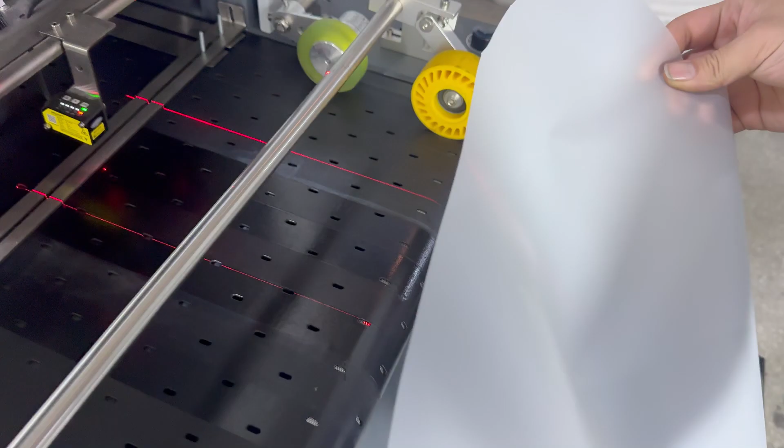Then we can start to do another check print. Before we do that, we need to find a full matte, half transparent material, like this kind of film, because the white ink cannot be seen when printing on white material. So before we print, we need to detect the media thickness. We put the media at the sensor position.

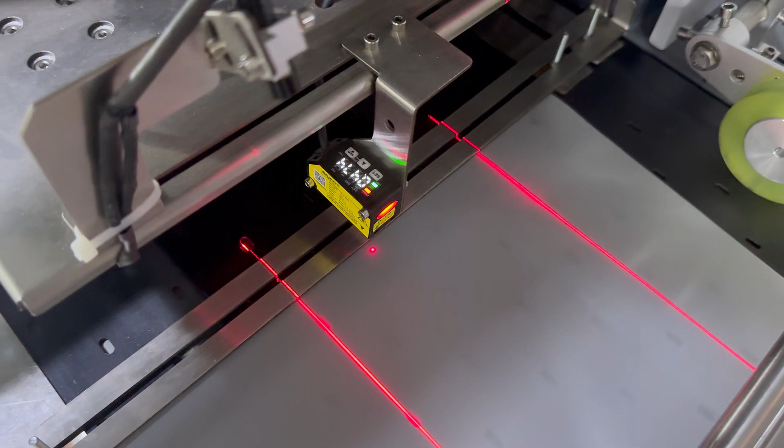Then we're moving up the carriage, and then we're moving down. When the red light is on, it means detection is finished. Then we need to close the vacuum. Close the vacuum, working. And we load the film from the front.

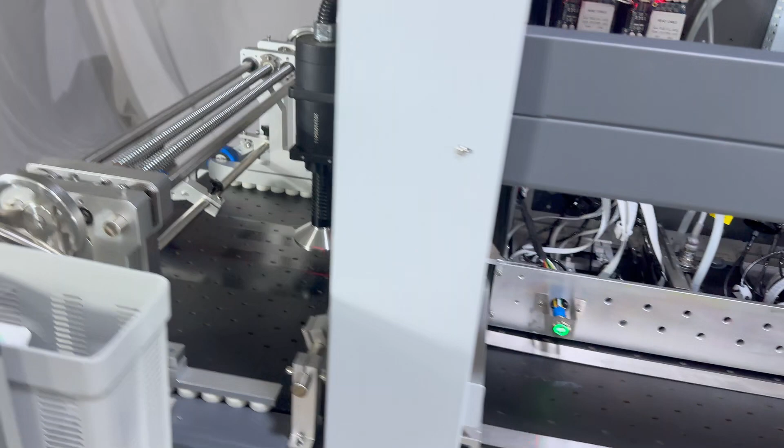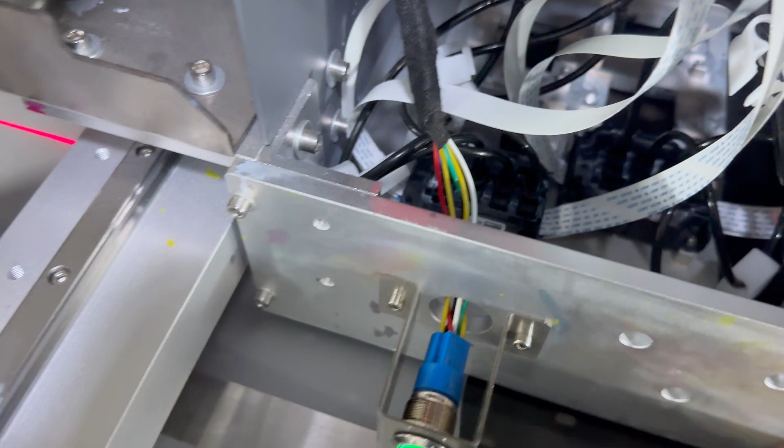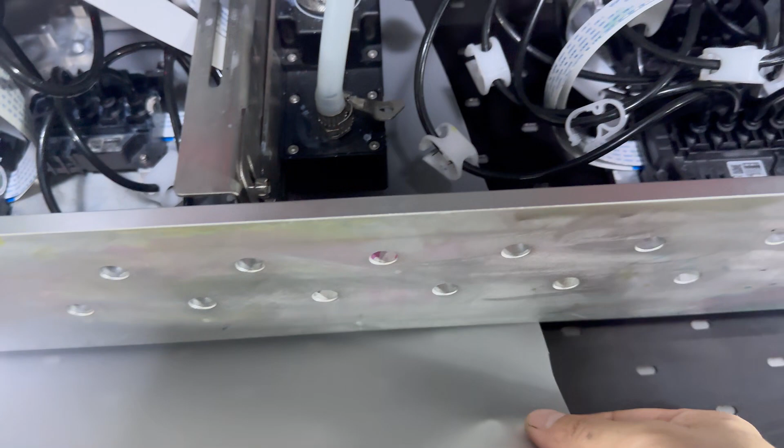Over the red color sensor to the printing head position. We can adjust, first move out this kind of pinch roller. Load the film to the bottom of the print head position.

Then we adjust the position of the pinch roller at the left and right side, at the lock. And also we adjust at the right side the pinch roller. We move it to pinch the media. Then we lock it.

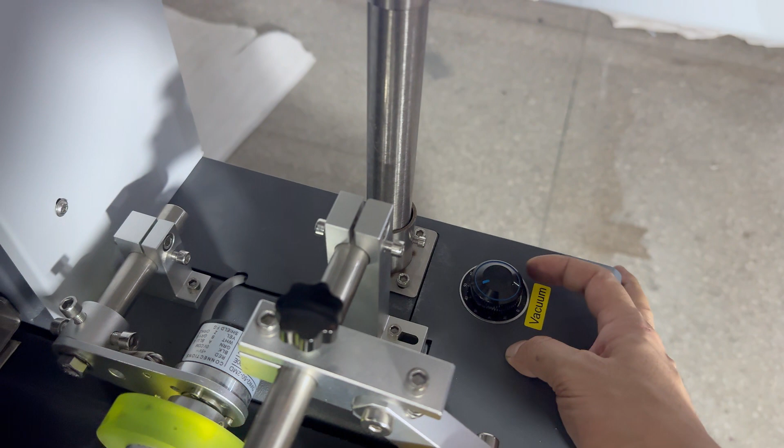And we also need to adjust the pinch roller strength from left to right side. Then we open the vacuum from the control panel and adjust the volume. This is maximal. If your media is bigger, then you only need to open it to 1/3 value.

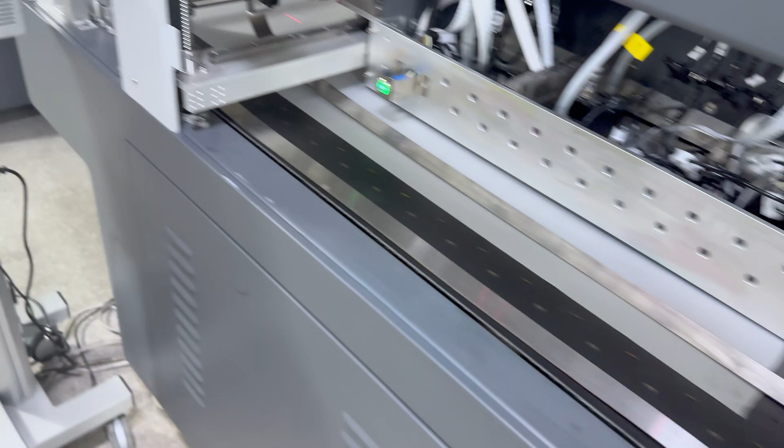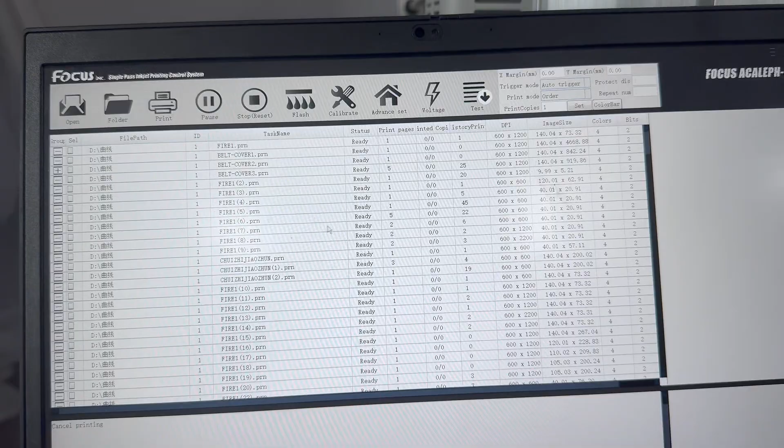Then we go to open the control software. We open the print engine, single pass. I choose the CFG file for the different print head model. Right now we have 8 heads, so we choose 8 heads. And here, then we can see the interface.

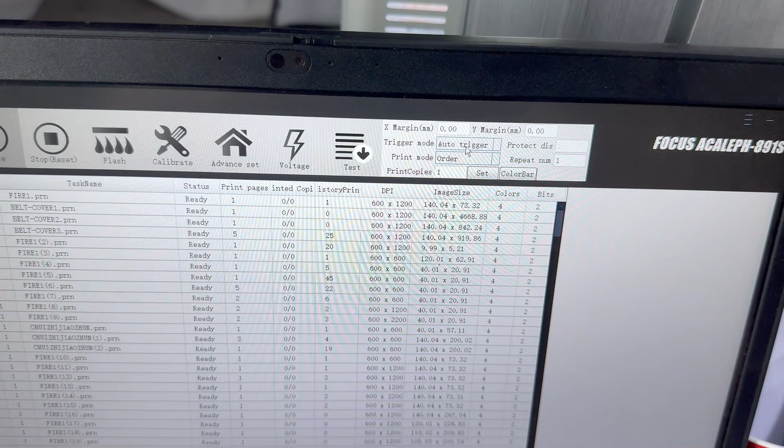First, we choose auto trigger here. If you are using DTF film, you choose auto trigger. If your media is in pieces, then we choose trigger sign. So we choose auto trigger.

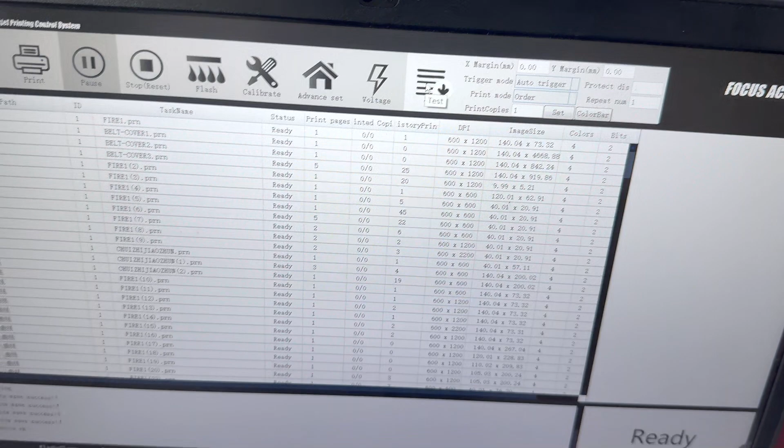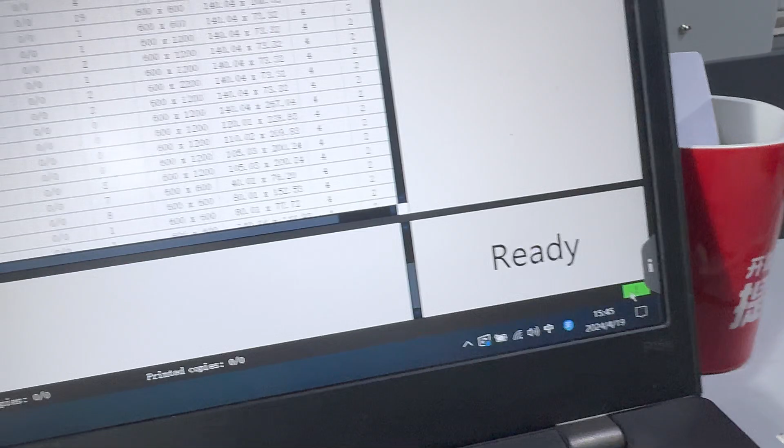Then we do a check. First, we check if it's still connected. Here, it's still connected, and all 4 control boards are powered on successfully. And here there's no error message. There's no error here. And then we go to voltage, and we check if all print heads' temperature is detected.

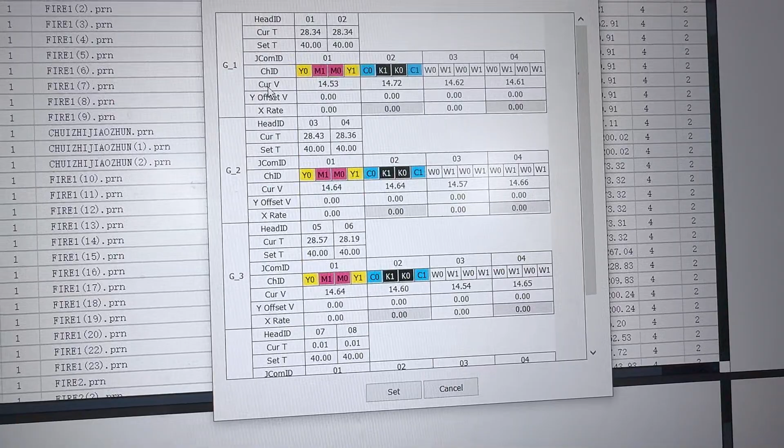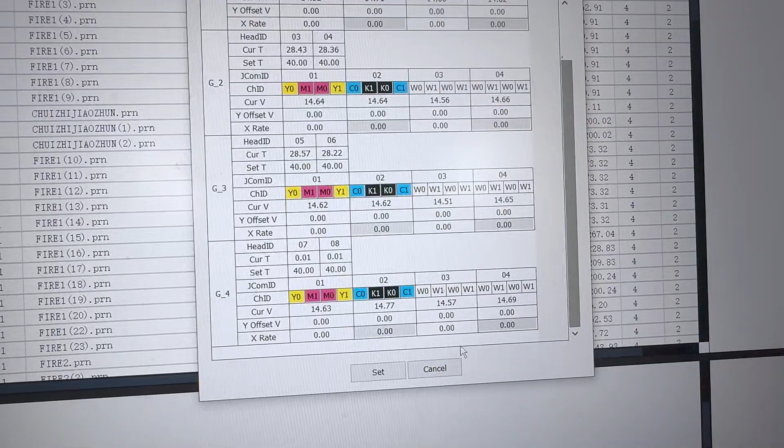Then we can start to do another check. We go to test. We choose load head status image. Then here we start to process.

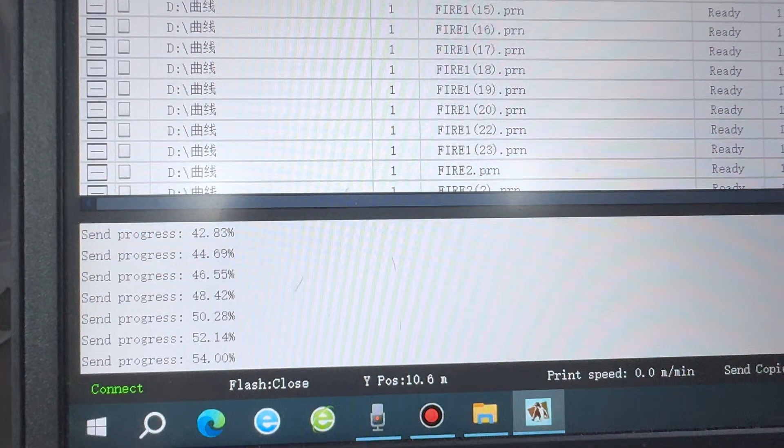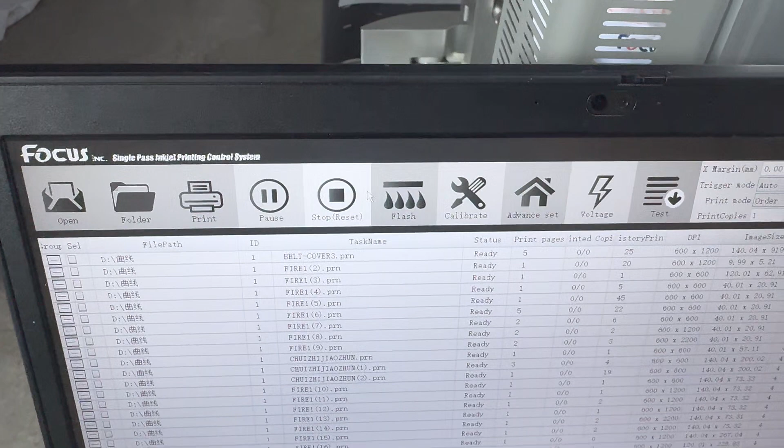Right now we must stop the belt motion. When it goes to 100%, now it shows 100%, and here the icon becomes gray. The print icon becomes gray. Here it shows print, then we can go to the belt control panel.

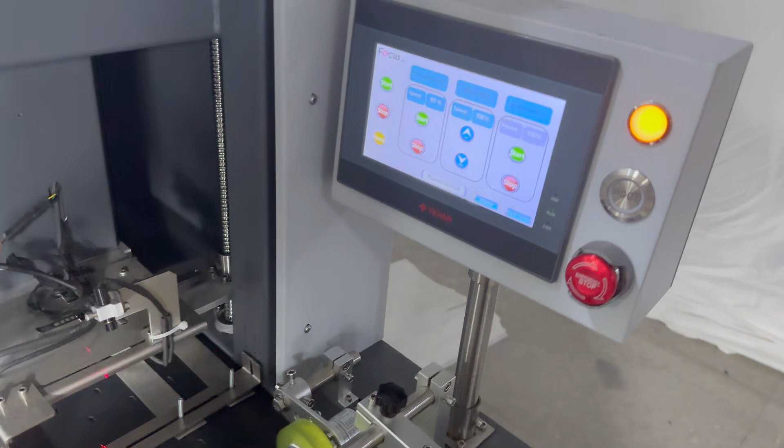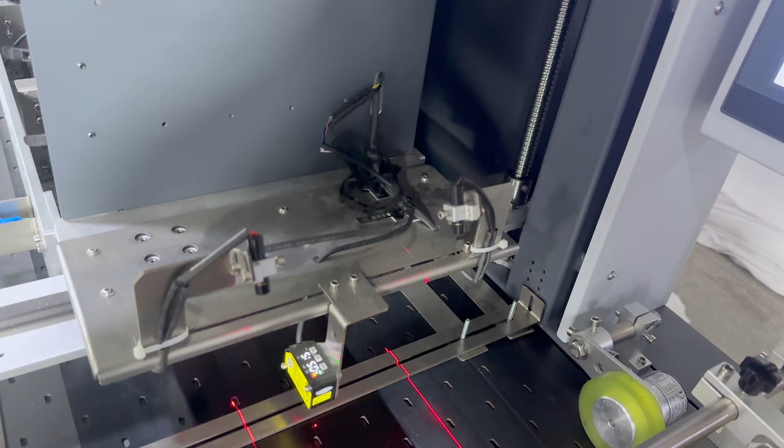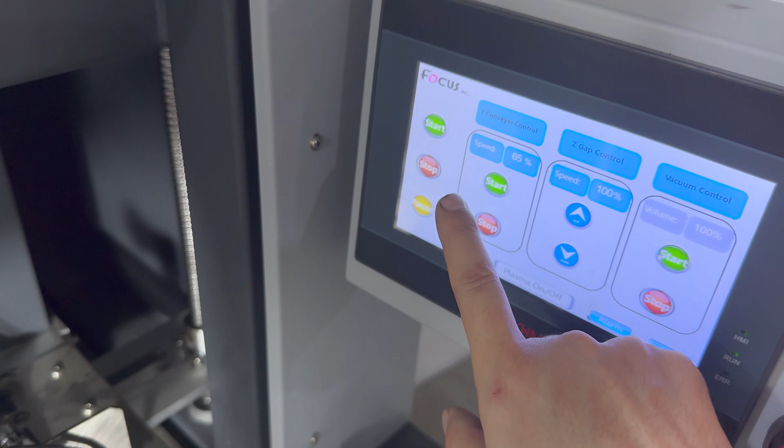And if your machine is the UV version, you need to power on the UV lamp and adjust the UV power strength. Then we go and click start. We set the speed to 65%, maximum is 100, but the speed is according to your printing head's printing resolution. Then we click start.

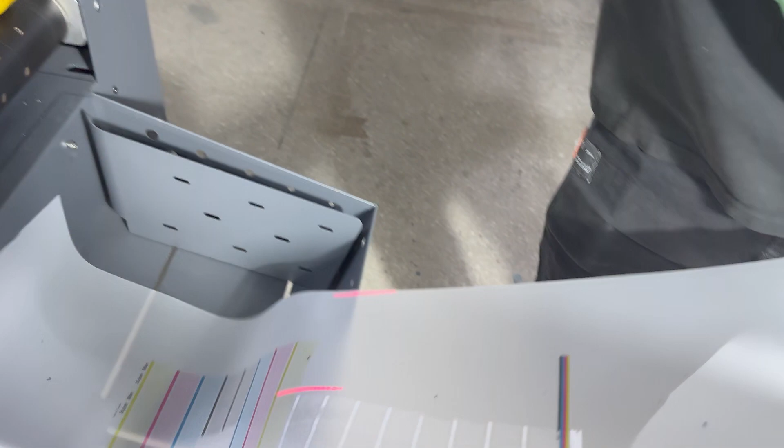Then the film starts printing. Then we can see the check print is finished. You can see the nozzle here. You can see the white ink still has bubbles.

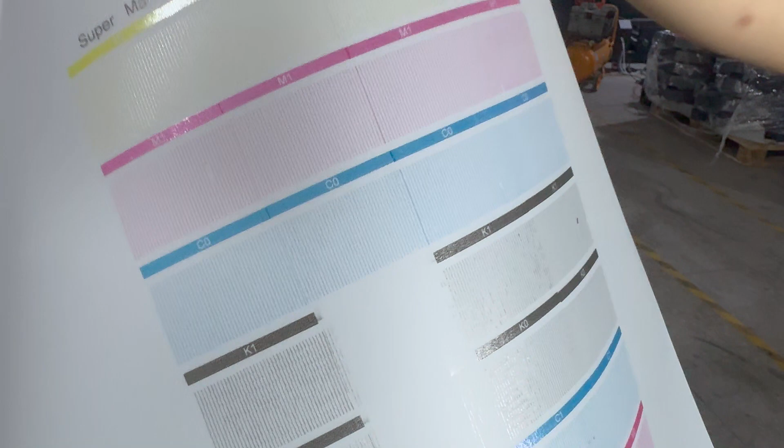The film goes through this way. So this is the first white ink, second white ink, and number 3, number 4 we did not put heads, so they're empty. For the color printing head, we can see number 1 white color printing head, number 1, number 2, number 3, number 4.

And for the color printing head, we can see the number 2 printing head's black channel is missing. So we need to double check. And also the white ink needs cleaning. It has bubbles or is clogged. So if it's the first time to load ink, we need to do some flushing.

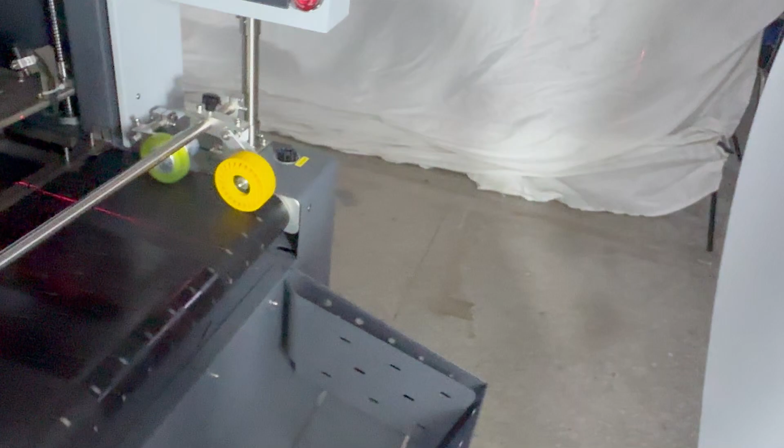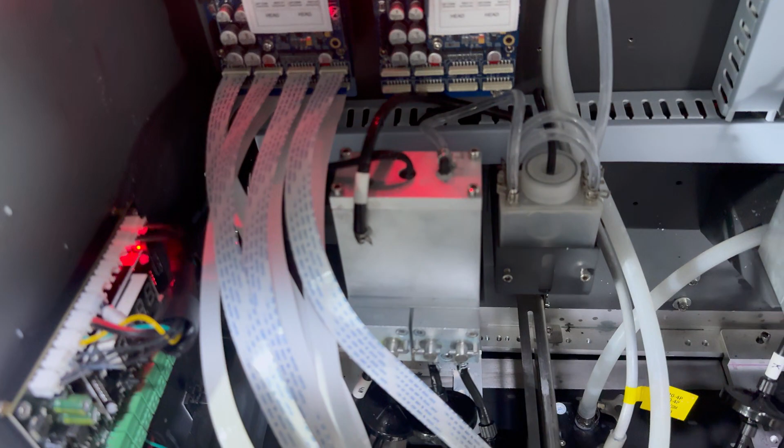Then we go to first stop the belt. And we go to the printing head position. We can see here we find some problem, so the missing channel has two possible solutions. First, maybe the printing head got clogged. Number 2, maybe the ink channel is not going through, it's closed. So we check the first printing head, the second printing head,

is closed or not. So we can see here the second printing head has the black channel issue. We can check and see this is a problem where the valve switch is closed, so we need to open it. You need to double check to be sure all the switches are open, and all the switches and the sub ink tank are open.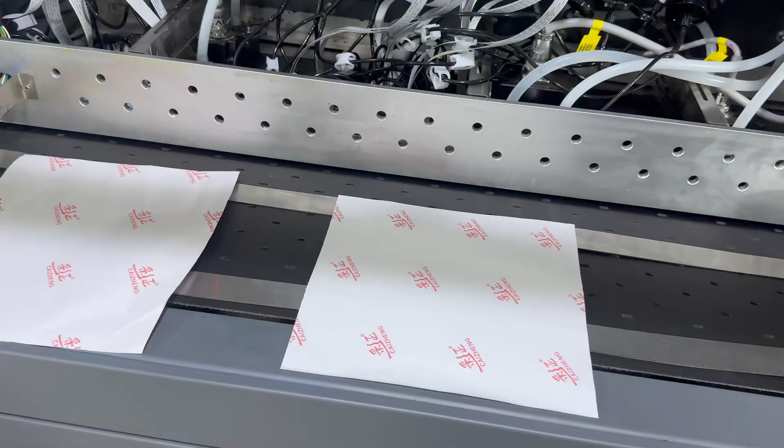And still we need to do a flush to flush the ink out a little bit. Then we check again. Then we start the flushing job using the control software to make the missing nozzle come out.

First, we go to the control panel to move up the carriage a little bit, not too much. Then we put the plastic paper at both printing head positions, white and color. The paper must cover all the print heads, otherwise the ink will flush onto the belt and make it dirty.

Then we go to the control software, go to advanced settings, and increase the flash frequency by 1 to 2 times. Then we click save, then we click flash.

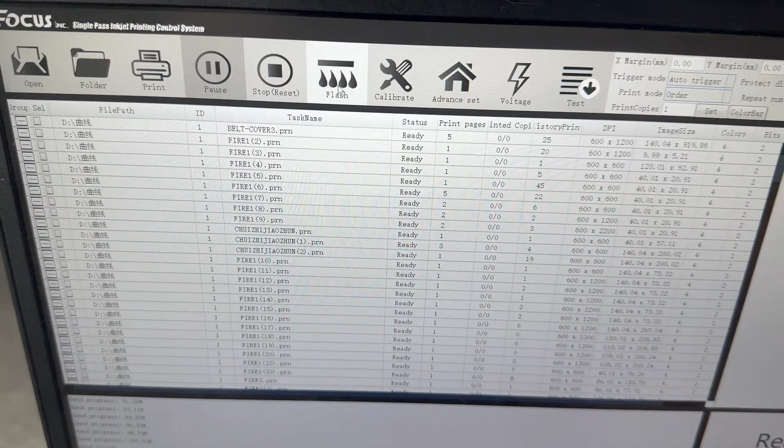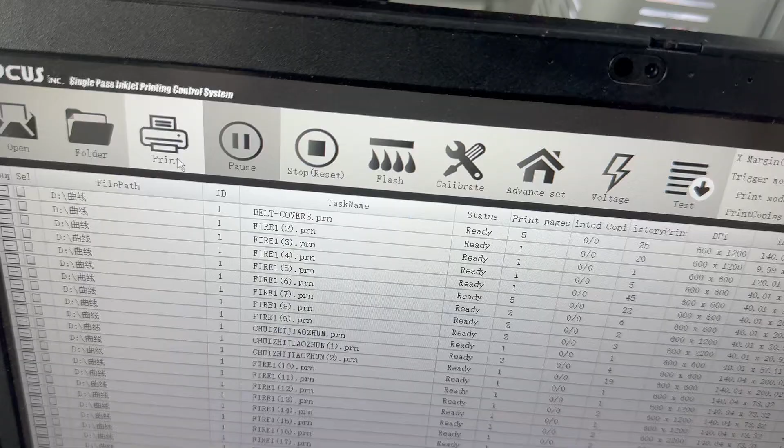Then the ink starts to flush out at the bottom onto the media. When the flash finishes, it will go back to the print interface. We flash again.

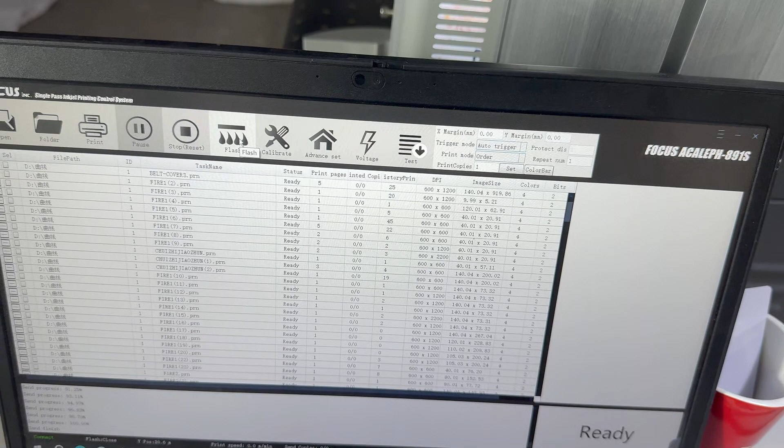Then we can check, we can move out the paper carefully. You can see the ink flush out, and also white ink. Because for white ink we only install 2 heads, the white ink still flushes out.

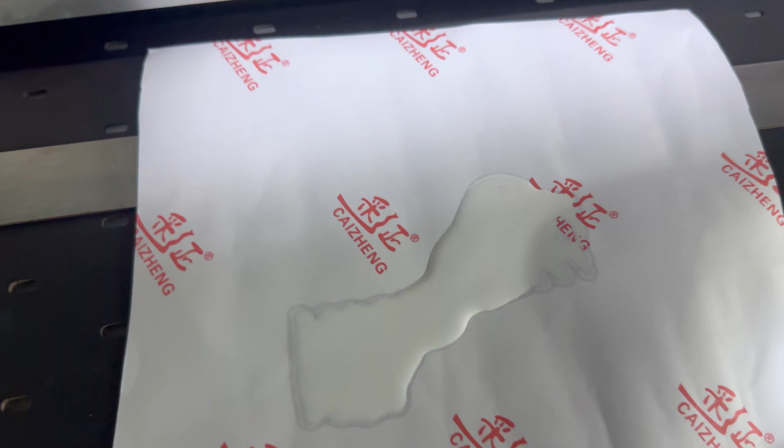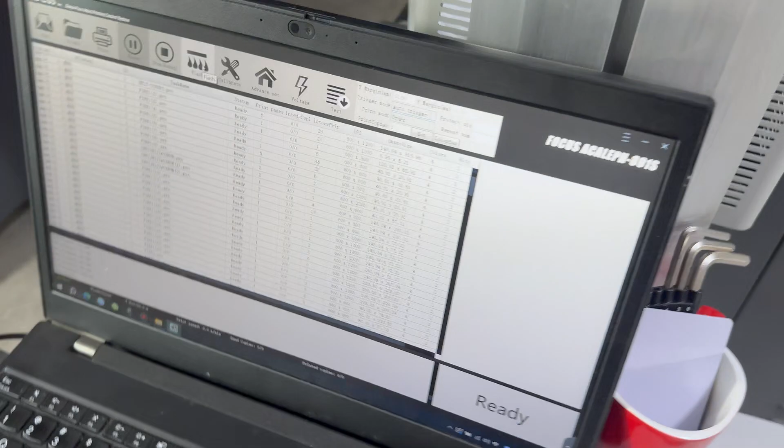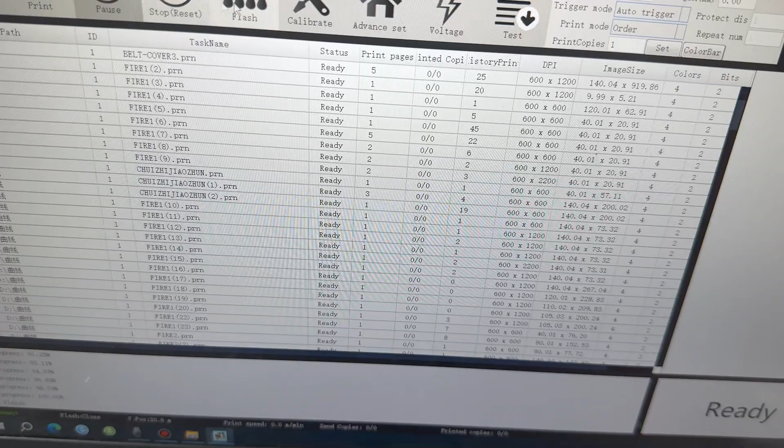And then we flash again to check. This is for checking, not for cleaning, to check if all the nozzles are flushing out.

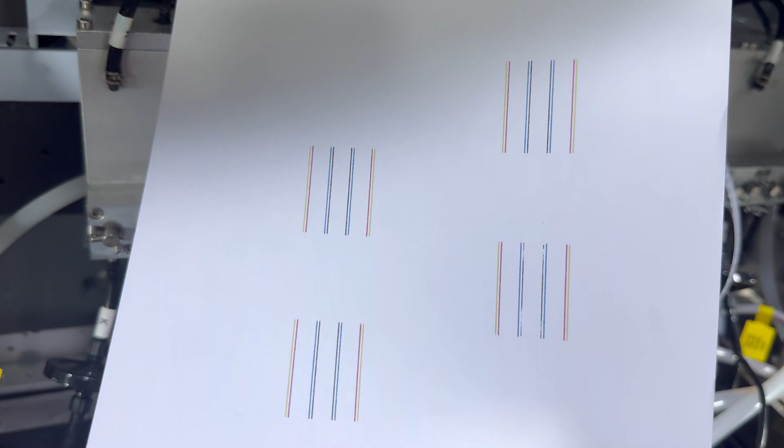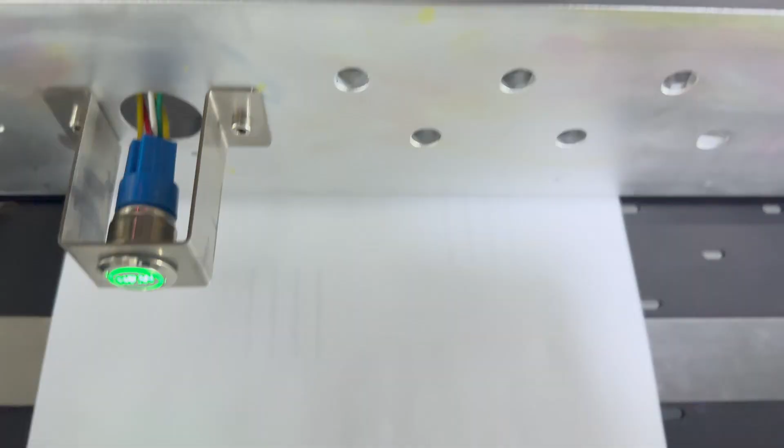After you finish, then we can see the black coming better than before, but still not enough. So this way we need to move up and clean by pressure. And with the wet ink, you can see it all coming out from both heads.

So this way we need to move up the carriage. Move up the carriage. Back, please. Touch screen.

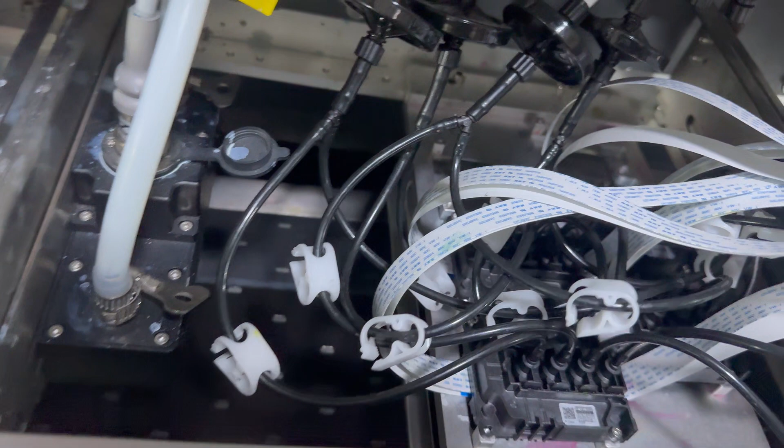So we just need to flush the black. We close the other colors. We close the first one, the black.

We keep it because it goes together. So we open the first one, close this one, and all the others are closed. Just flush the black.

So the other colors are closed. We just keep number 2, and number 1 and number 2 head black channel open. We need to flush one by one. So first we need to close number 1 head black, keep number 2 black open.

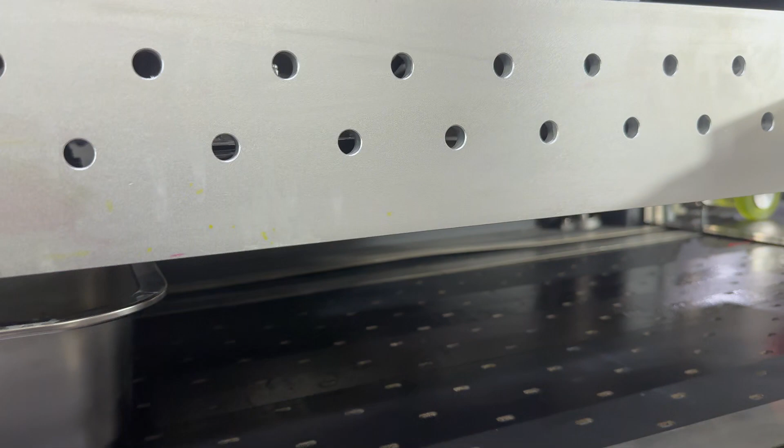And then we go push the positive pressure. You can see number 2 black is coming.

We clean for about 5 to 10 seconds, 5 to 10 times. And when we push down, we cannot keep it held all the time. We must push down for about 2 to 3 seconds, then release. 1, 2, stop, and 1, 2, stop, like this.

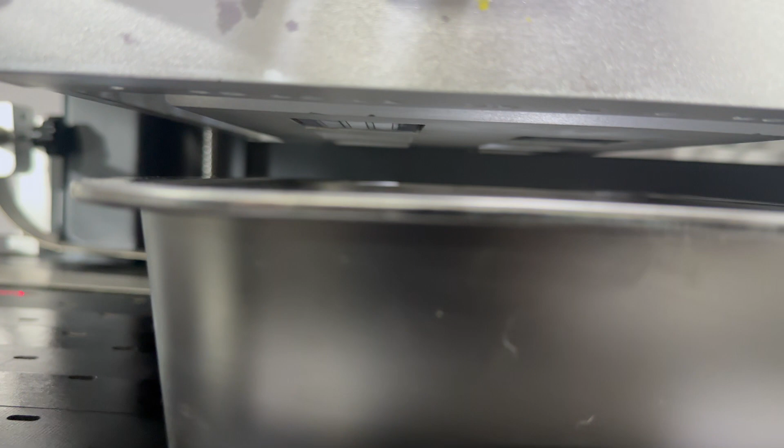And also we can see the black, and the white ink is also not good, so we need to flush the white ink a little bit.

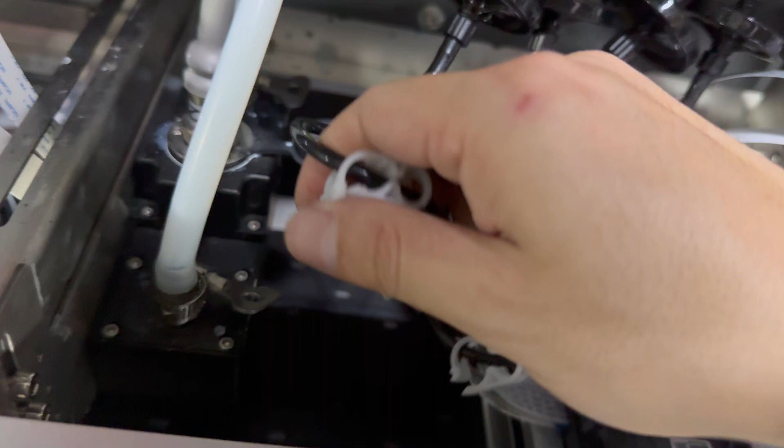After we flush, then we need to remember to open the valve for both ink tanks, the ink tubes. All must be open, not closed. And we flush again.

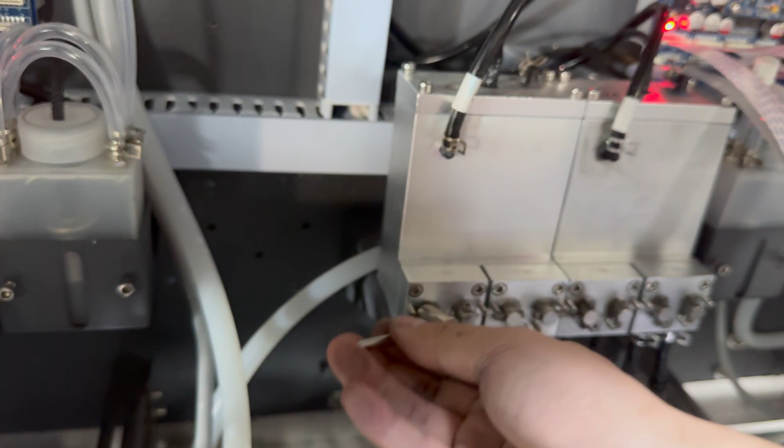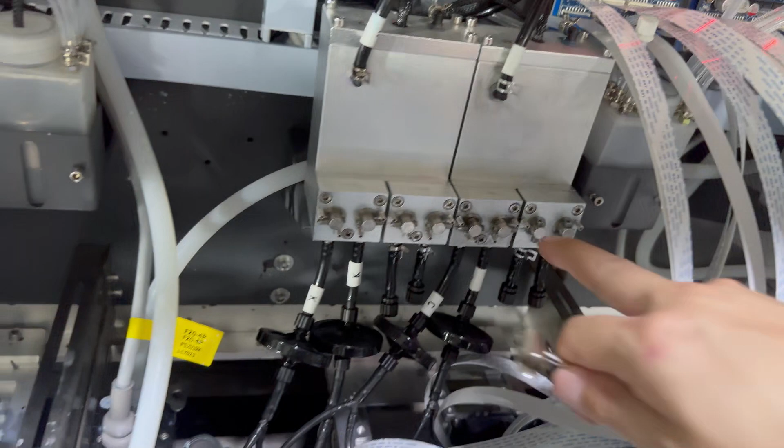After flushing, then we need to keep all open to work. Open all the valves, the switches. All are open for each color. All open, and also the white ink open.

Then we need to wipe out the waste ink at the head surface using the wiper tools.

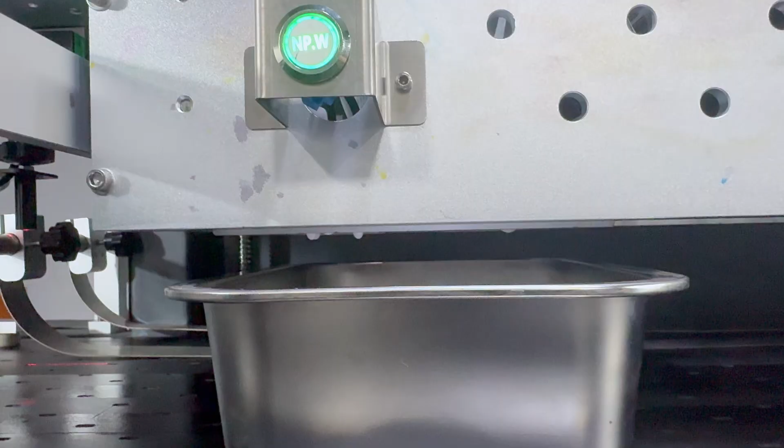And also wipe the white ink, both white ink heads.

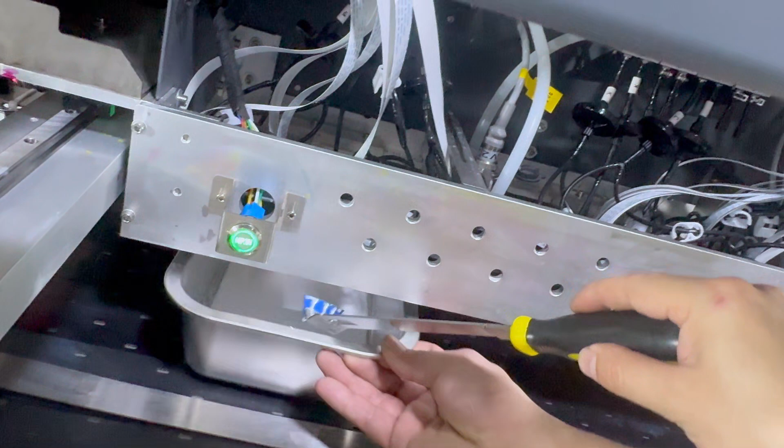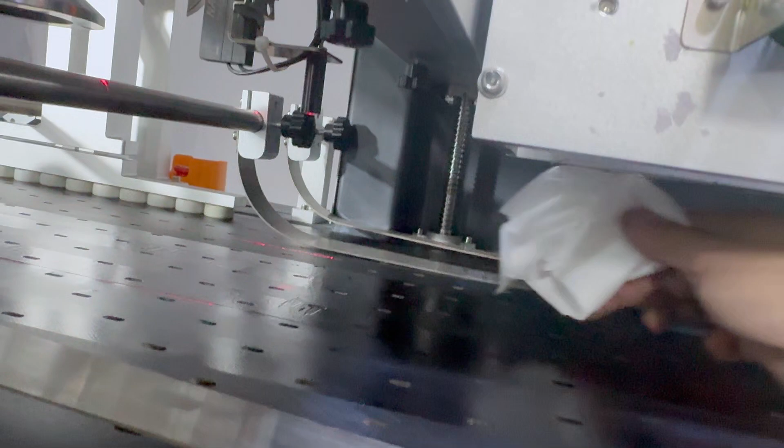Then we need to move out the tank. Now we use clean tissue to clean the surface of the printer head for both white ink and color ink.

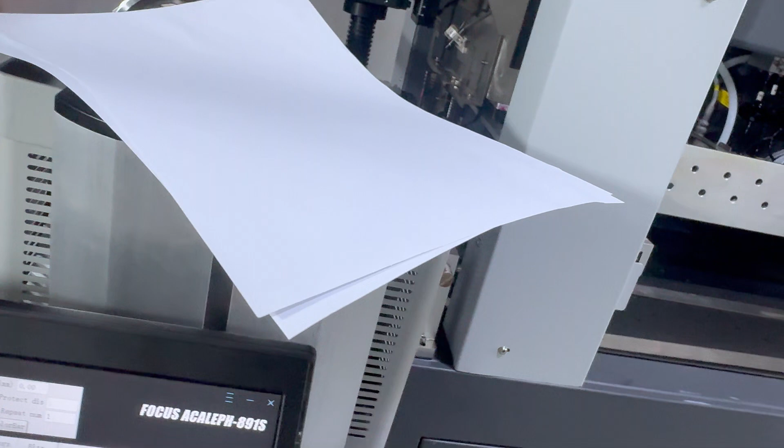Then we can flash a small volume again. We go back to the software and check that the flash frequency is 4, 2, small volume.

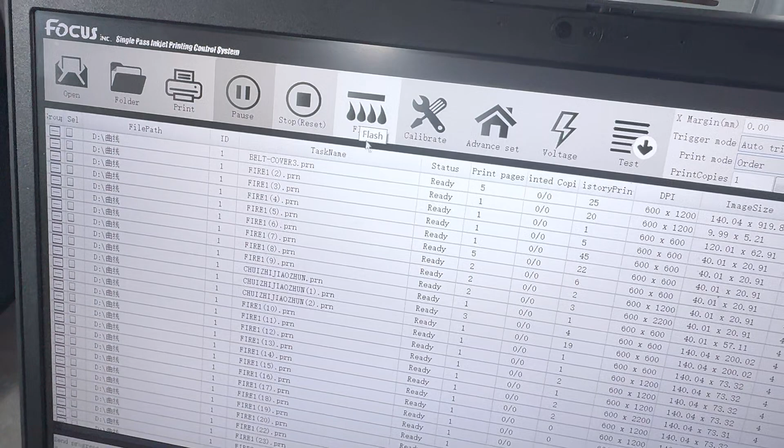We put one for white at the bottom of the white head, and one for color head. We can use the hand to hold at the bottom of the print head button, like this. Then we go to software, double check, flash small quantity. Then we choose click flash. When finished, then we can move out.

Now we can see the black is coming. But you can see here some little bit mixing color because we use the cleaning. So this way we just use the big flash back to 40 frequency again. Then we can start to do nozzle check again to check if the nozzle is good.

So here, for example, we get a flash like this. We can see all channels are okay. Just the two black channels mixed with cyan ink. It's not pure black. So by this way we need to do big flash.

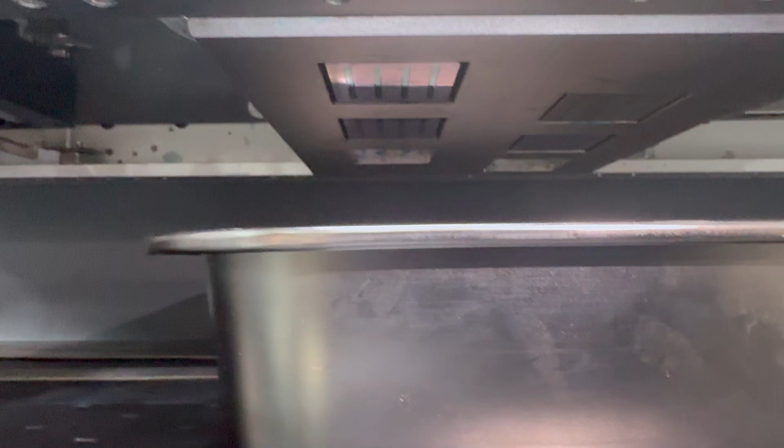Now we start flash. You can see the ink flush out for big quantity. But after flash, we can see here some waste ink stay at the surface of the printing head. So we need to use the clean tissue to wipe out, to clean the head surface.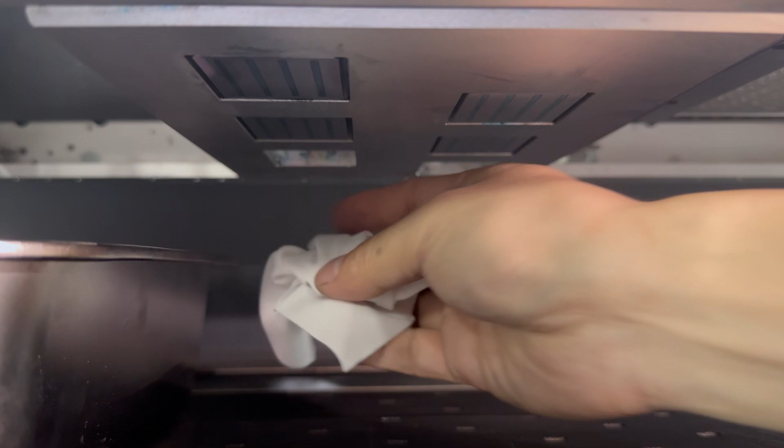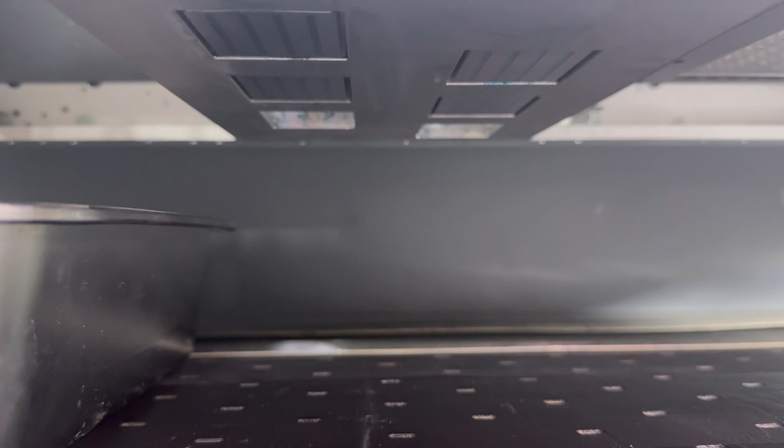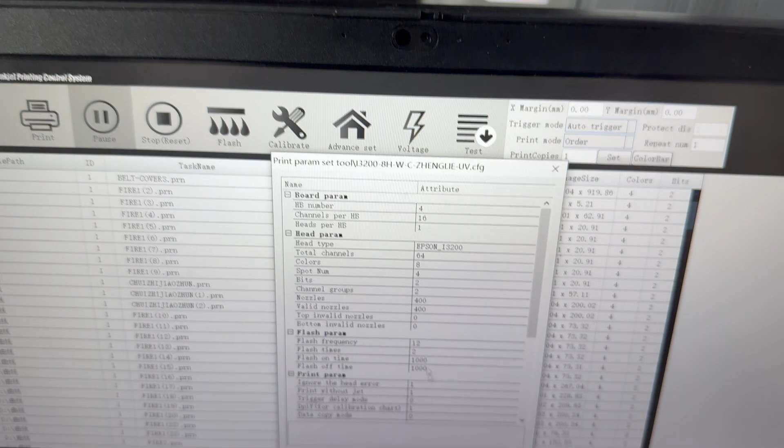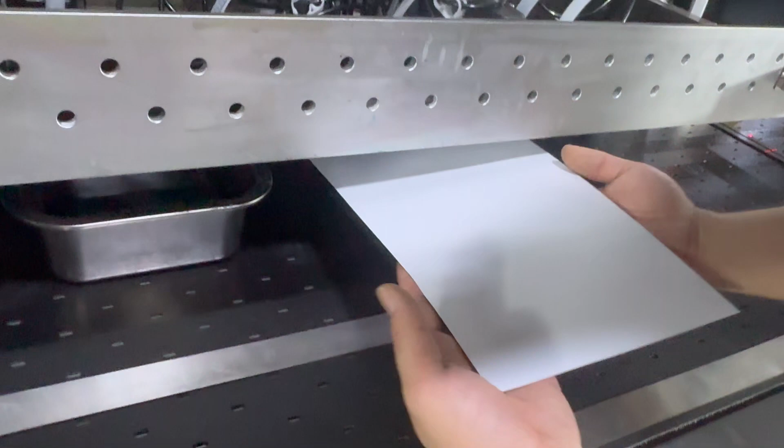For both white and color printing head. Then we flush again. We go back to advanced set, and we choose by small flush by 4. And we put wet paper at the bottom of the head, but not touching the printing head. Then we flush again.

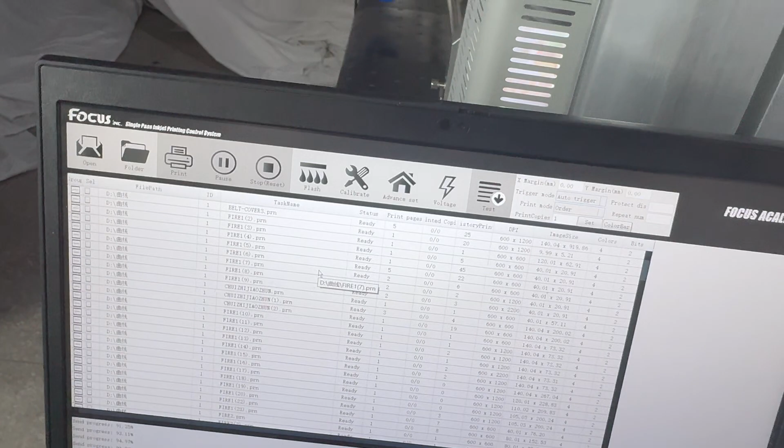Then finish. Then we can see the black. The black is good. You can see the black now is good. It's not mixing. See? This is before. Before, cyan meets with black. After big flush, good.

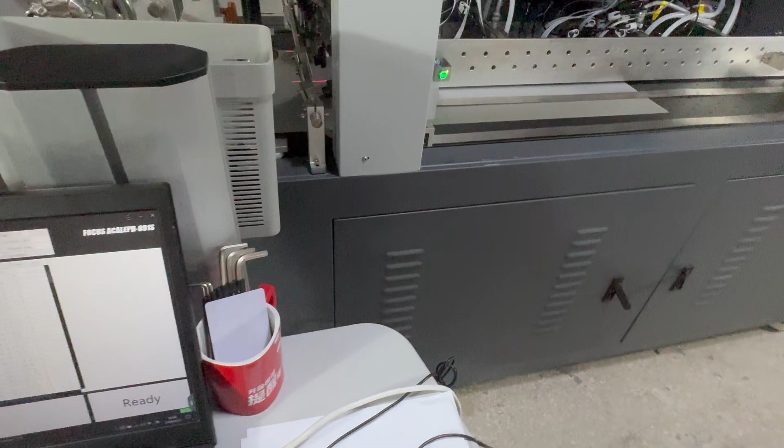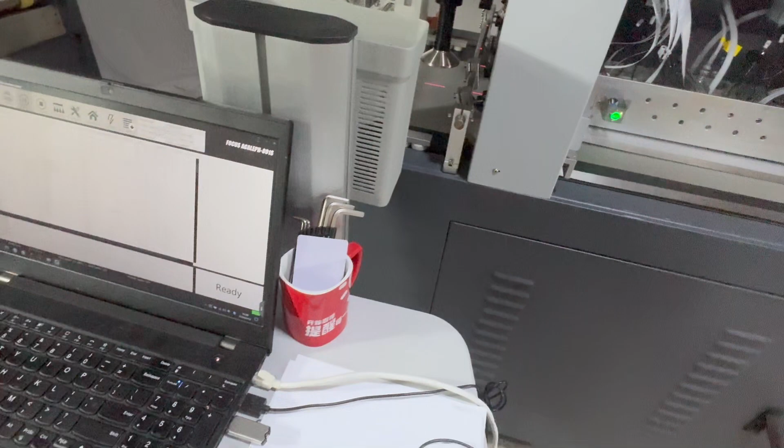So by this way, we can start to do the nozzle check again. Nozzle check print. After we did the flush, we did cleaning by active pressure, and we did cleaning by flush, big flush and small flush. Then we start to do the nozzle check print again. We go to software, we load, test, status, print. And waiting for 100%.

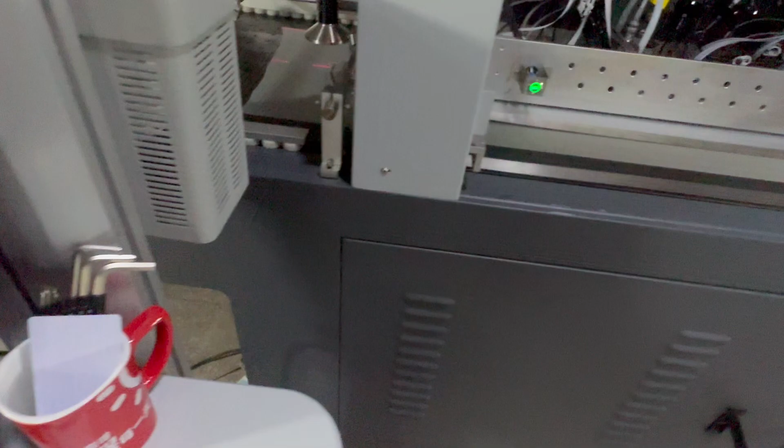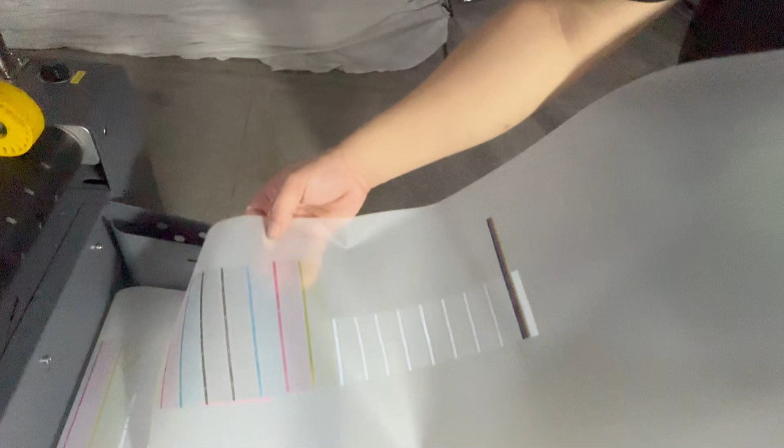When 100%, we can start to load the media at the bottom of both white and color printing head. Then we go to start. And now we can see the white is good. All channels coming. The color, all are coming. See the black is good. The black channel is coming out good.

KCMY four heads. Number 1 white, number 2 white, number 1 white color, number 1, number 2, number 3, number 4. 4 color heads, 2 white heads. KCMY, all channels are good. Like this.

But the white ink has a little bit of bubbles. So we need to do small flushing again, or negative and positive active cleaning. So this is a procedure to do the load, to do nozzle check and cleaning job process. Anyway, we must be sure all the nozzles for white and for color come out over 90%. Then we can start printing job and alignment.

Then we start to print again. We put the media at the bottom of the printing head and open the vacuum and then click start. Then we can see the nozzle for white, number 1, number 2 is coming, and for color, the color ink channel is coming. All are good.

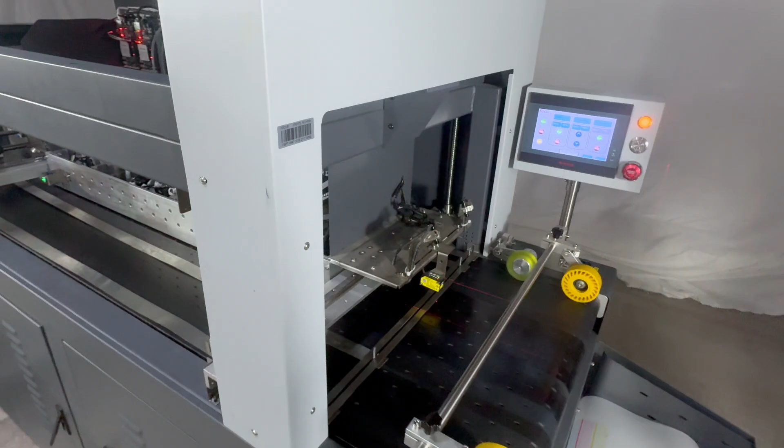This way we can easily see the white ink nozzle check and color ink nozzle check. We now only put 2 heads for white, so here these 2 heads are missing, and the 4 color heads like this. If we can get a good check like this, we can start print.